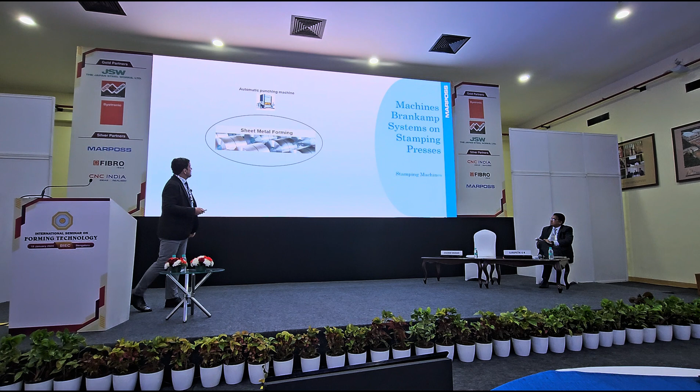What kinds of machines can we monitor? There's a huge range of different machines: automatic punching presses, high-speed presses, coining machines, drawing presses, fine blanking. You see, it's a wide range of machines that we have.

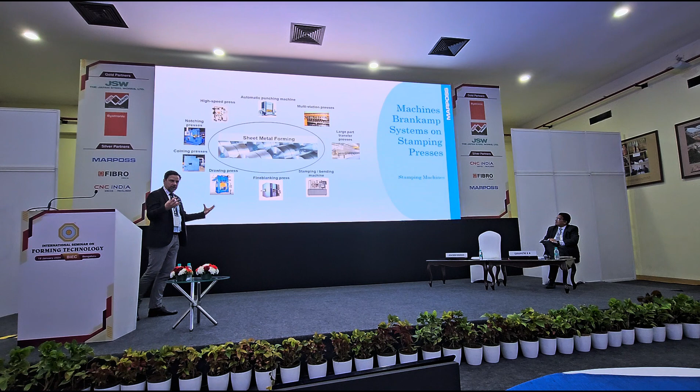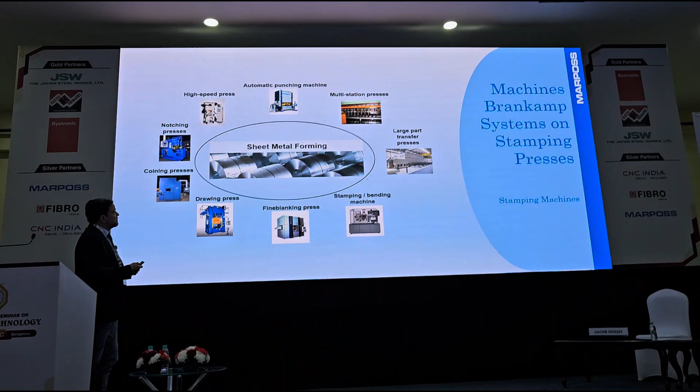Depending on the machine type, there are different approaches from the customer. If you have a large transfer press, of course you have more issues with, for example, splits or cracked parts, because you usually have drawing operations of the big automotive parts. If you have high-speed presses, it's more slug detection because you have very thin material and fine parts, and the machines are running very fast. So it depends on the machine what kind of application we can offer to our customers.

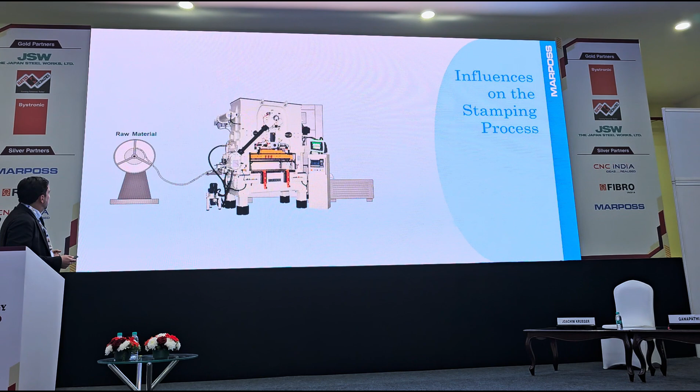What influences the stamping process in your plant? Of course, the raw material — we heard in the presentation before about the influence of the material — and of course the supplier.

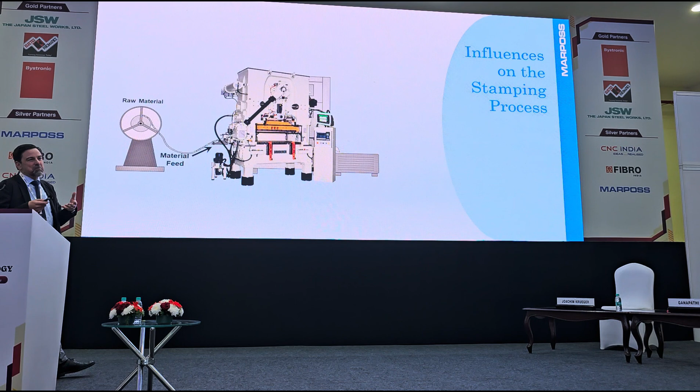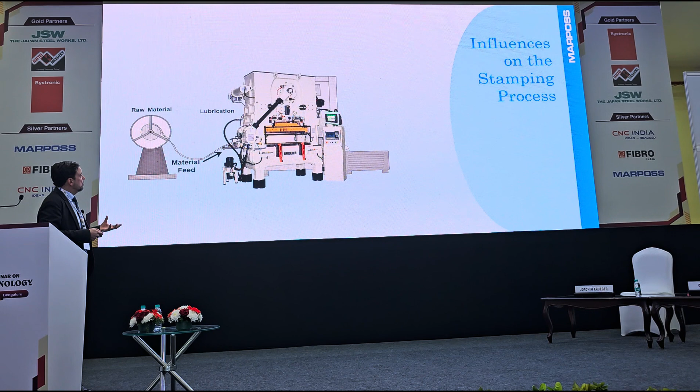So therefore, we have influence by the material, influence by the feeding. The feeding monitoring in stamping is mandatory to protect your tooling. Then we have the lubrication — sometimes it's more or less, maybe the oil is different, lubrication is different, so that also affects your process.

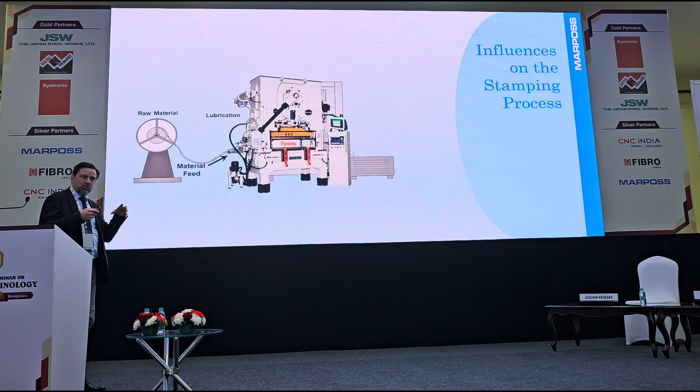Then the tooling — the tool wear, the condition of the tool, the setup of the tooling — all these things influence your end product. And then of course the machine itself: if it's in proper condition, good maintenance, or maybe the bearings are a little old or not good anymore.

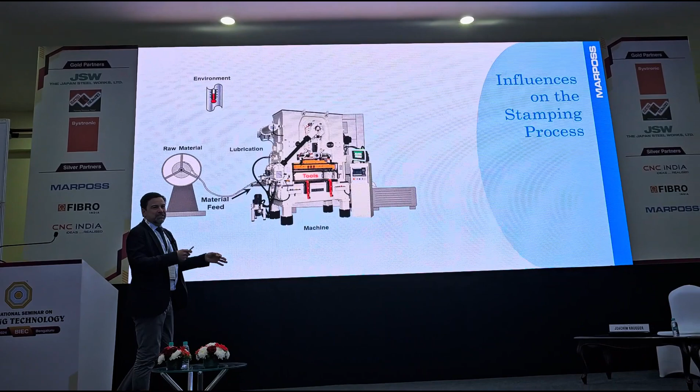So therefore it could also influence this process. The environment — with our piezo sensors, it's a difference if the machine is cold and you start it in the morning, or after 30 minutes when the machine is warm. We can see this as an impact on the force inside the tool.

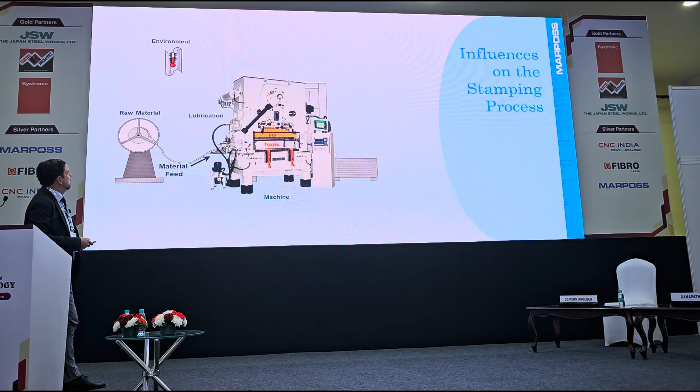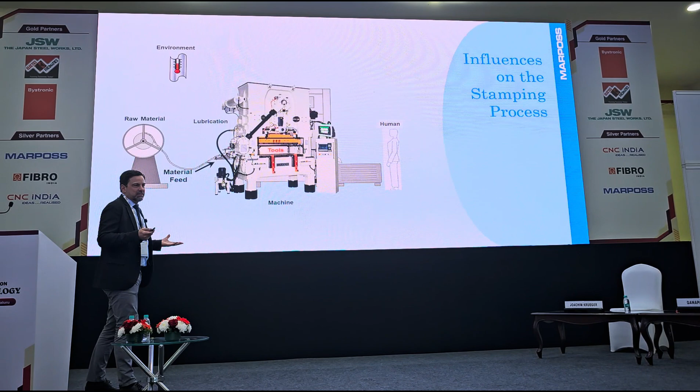And of course the human factor, depending on the operator — maybe the machine setup is done properly, or maybe it's not, and we can see this. These are very complex tools, so not every operator can handle them very well, so the setup of the machine and tooling ultimately comes down to the operator.

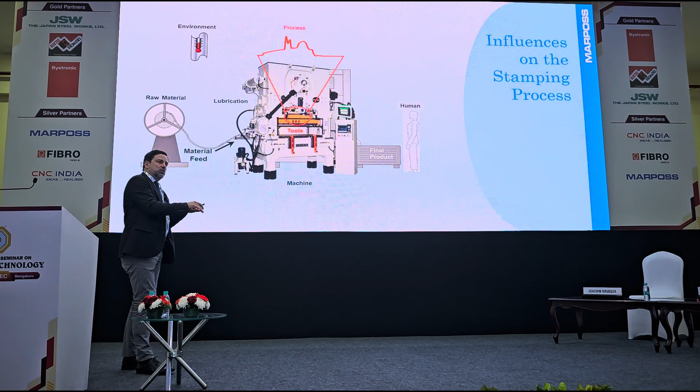And what we do is monitor in-process what's happening when the punch is going down and the stripper plate is going down. We collect these forces and try to find out if something is going on.

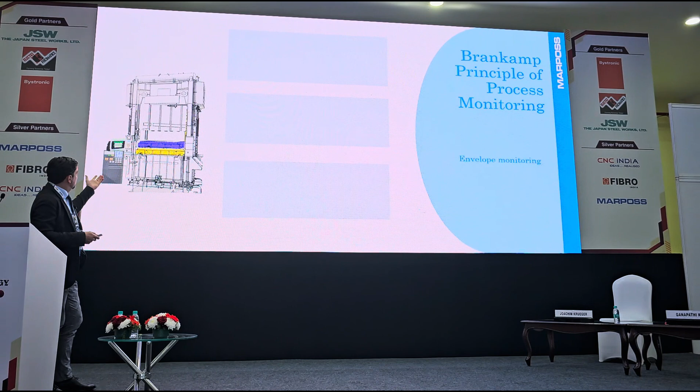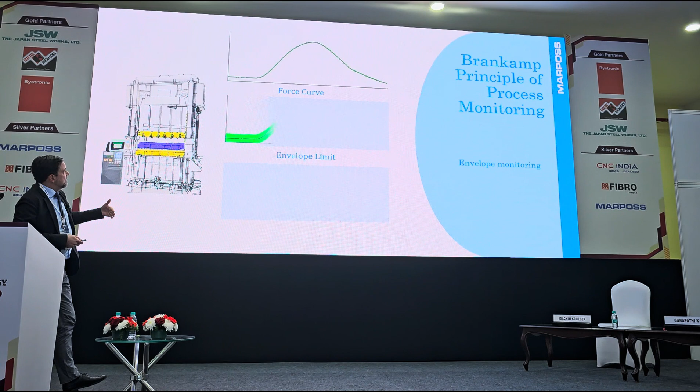The basic principle is this: we can mount different kinds of sensors on the machine, and as the machine moves up and down, we receive a force signal. In the next step, the system automatically puts an envelope curve with an upper and lower limit around this, so we are comparing one punch after another.

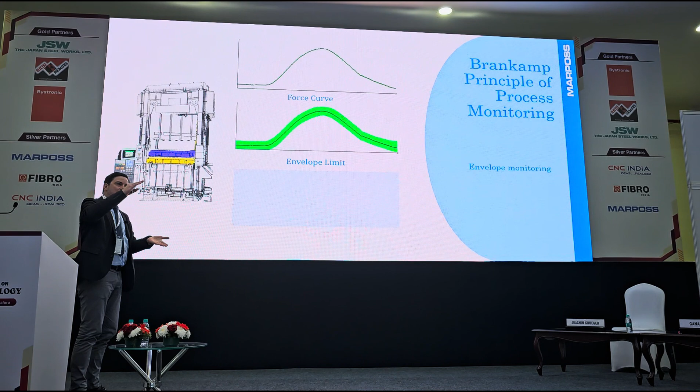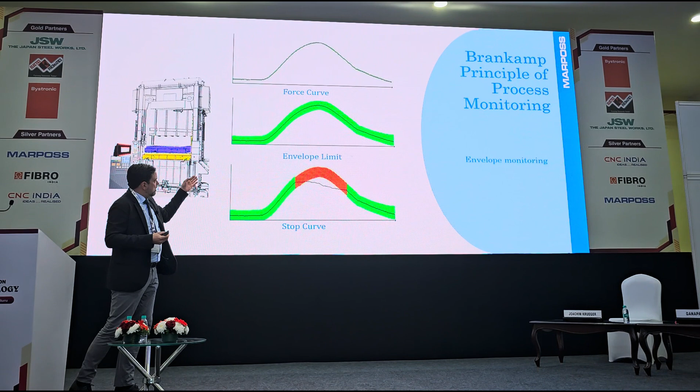After the teach-in, which usually takes half the stroke time — for example if the machine is running 100 strokes, 40 or 50 strokes are used for setup — the system automatically creates the envelope curves and the operator doesn't have to do anything. If something unexpected happens, like a crack, a slug, or a punch breakage, the force goes outside the limit and we can stop the machine.

For stamping machines, we usually stop the machine. If you have a sorting gate, we can of course sort out these parts.

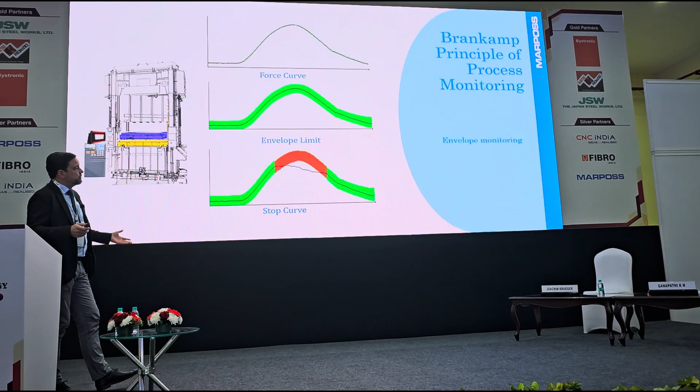The sensor positions depend on what kind of failure we want to detect. Of course, if you have small slug marks or scrap marks, we are not able to detect them with a frame sensor — we have to get close to the process.

But for example, for general monitoring, the frame sensors or the conrod sensors are good enough. If you want to go deeper, you have to mount the sensors behind the punches or in the stripper plate — you have to glue them.

We have different kinds of sensors for all these applications. Maybe you have to drill a hole, or maybe you have to make a pocket where we can glue the sensors.

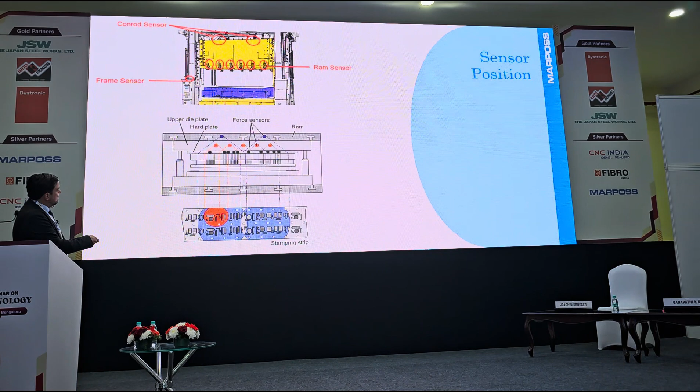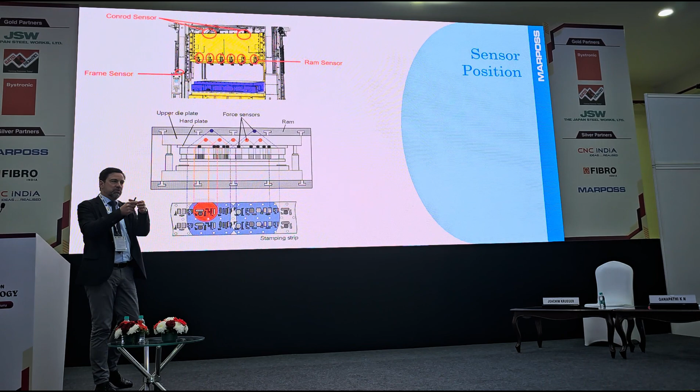In the next picture you will see the difference between sensors that are far away from the process — they can cover a bigger part of the tooling — and if you go closer to the process, then you have really precise, detailed information about a small area.

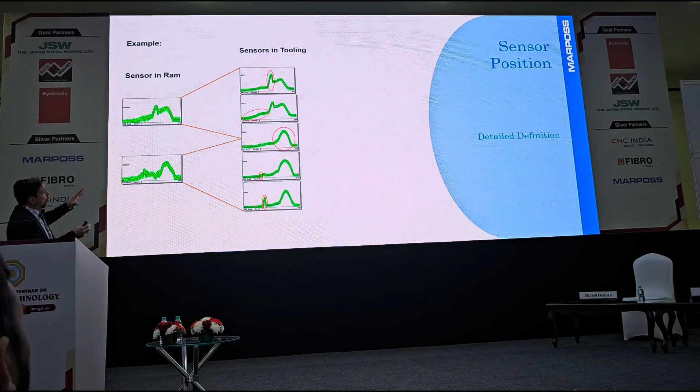Here's one example of the sensors in the ram — that gives an overall force for, say, half of the tool. As you go closer to the process, you get the signal for blanking, and you get the signal for the drawing operation.

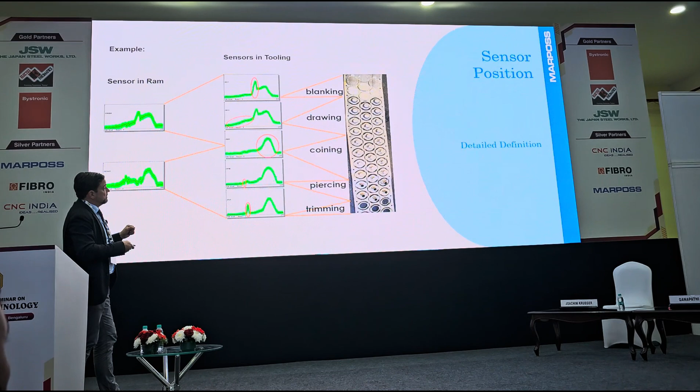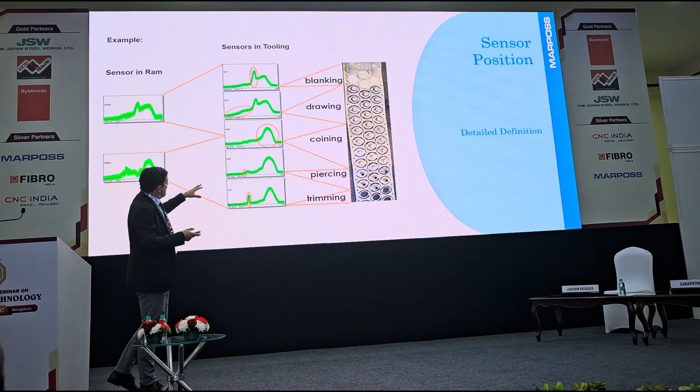You can see that those signals look different — you have a different signal for the piercing operation and for the trimming operation. So depending on the application, if we have a drawing operation and want to detect splits or cracks, we go into the drawing punch. If we want to detect scrap marks instead, we go into the stripper plate.

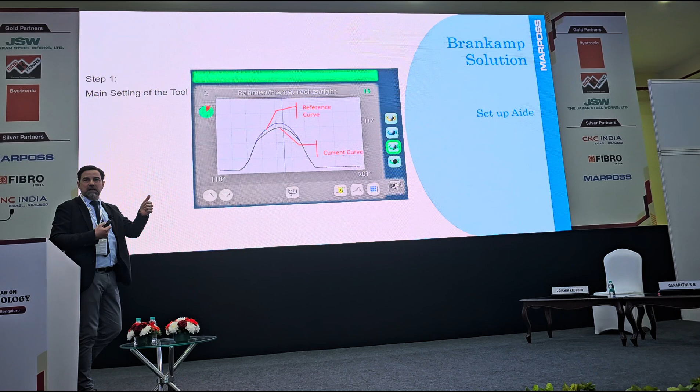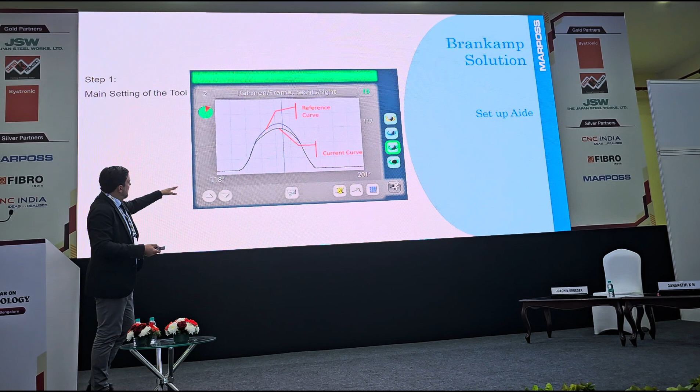During setup, if the operator is producing good parts, he can store that as a reference curve for each channel or sensor we monitor. Next time the tool comes into the machine, he can load this information and compare the reference curve with the actual curve. If it's close to the original, the setup is better, and the operator can say it's a 100% match to the last time he produced good parts, then start the job.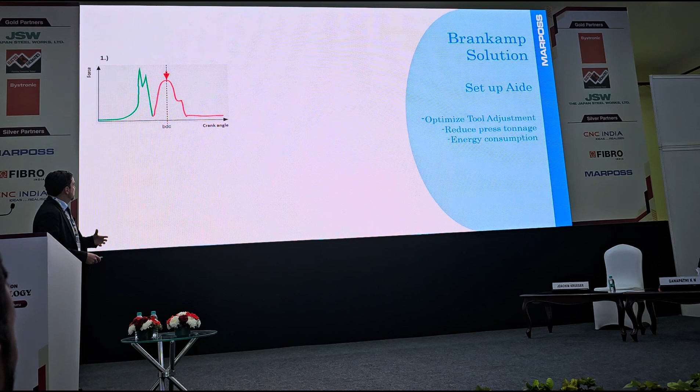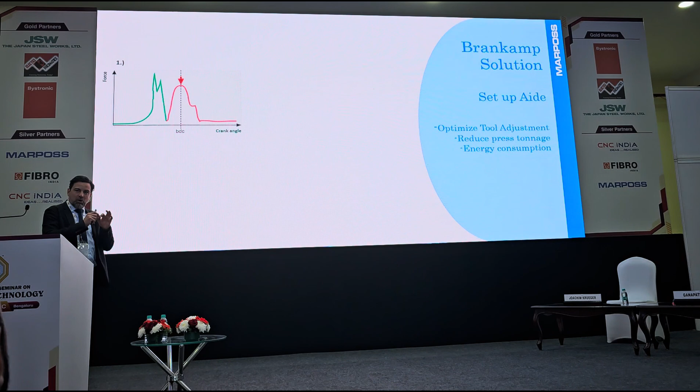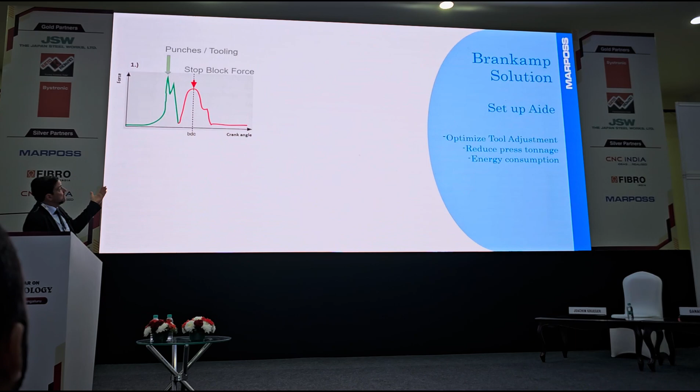Another key point is energy consumption. One problem is that some customers drive too far and then drive into the stop blocks, using energy they don't need. The green curve is only the force needed to produce good parts, while the red curve shows excess force from driving too much onto the stop blocks. If the operator detects this early, he can change the machine setup, and after a while get the perfect signal with lower energy consumption to produce the part properly.

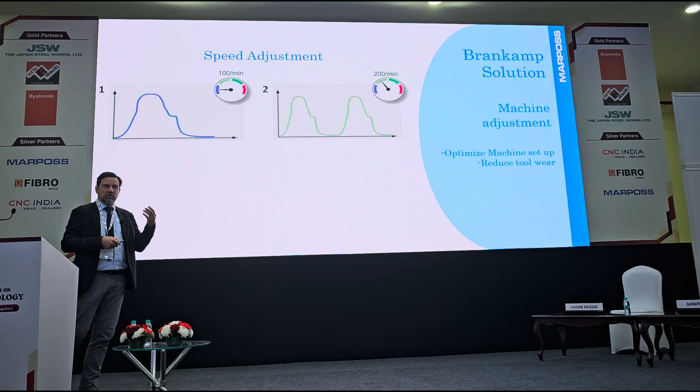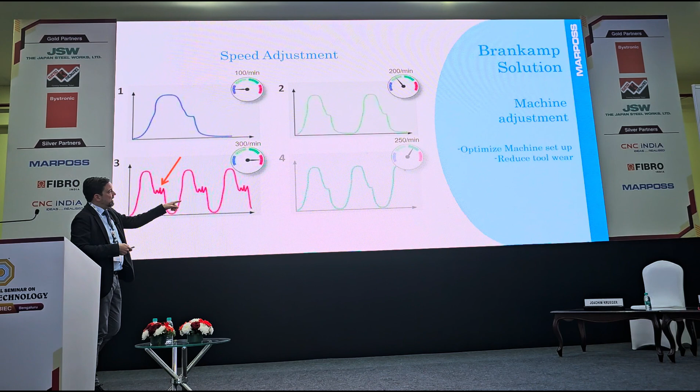There are also speed adjustments. If the quality factor is good enough and the signal is stable, you can run the machine faster and faster. If it becomes too fast, you'll see the signal changing, so the operator can reduce the speed and find the optimized speed for the product where the signal stays stable and the part is produced properly.

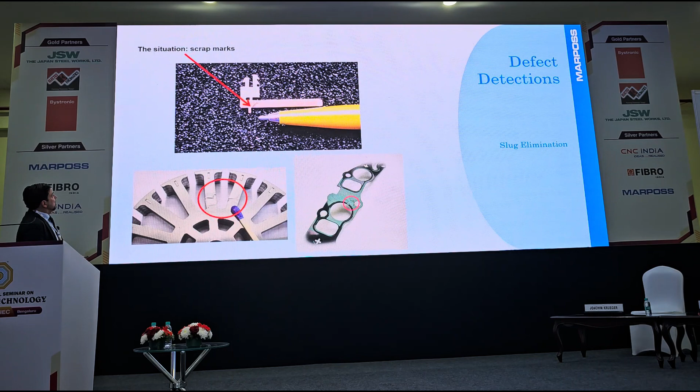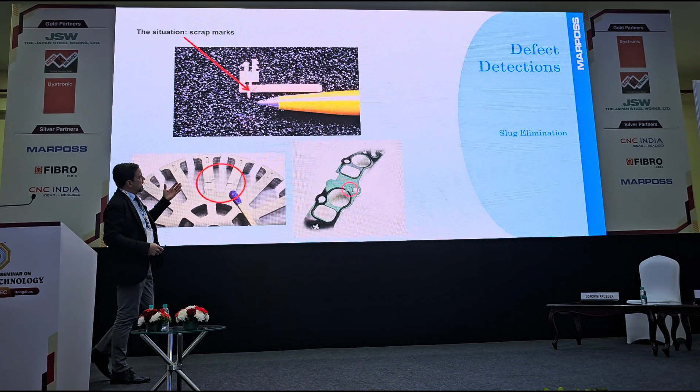Here are some examples of failures we can detect, like a scrap mark. It may look like just one mark, but if you produce 6,000 or 10,000 parts that go to customers, into injection machines, and are built into a car, it's extremely expensive to bring all those parts back. We've had cases in the connector industry with customer complaints requiring 10,000 parts to be returned, costing millions.

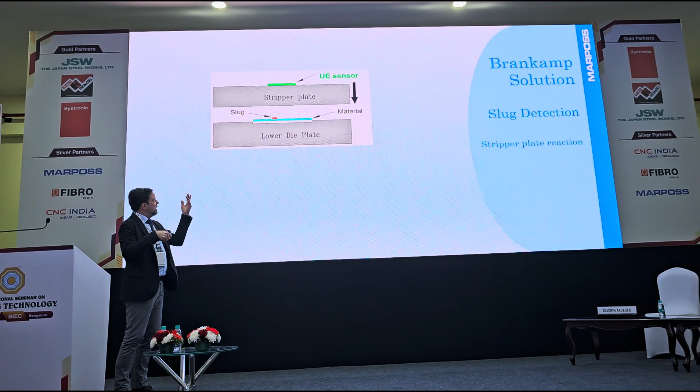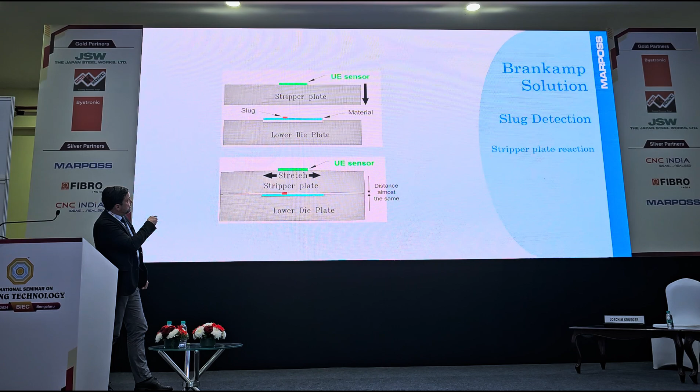This is the principle of slug detection. We go into the stripper plate and glue a sensor there; the tool department prepares pockets in the top of the stripper plate, and we glue sensors inside those pockets, running the cables out so the operator can easily connect them. If a slug falls onto the material, with the next punch we directly detect that material is lying between the sheet metal and the stripper plate, and we immediately stop the machine, telling the operator in which section the slug was detected so he can check the tooling and produce the part properly.

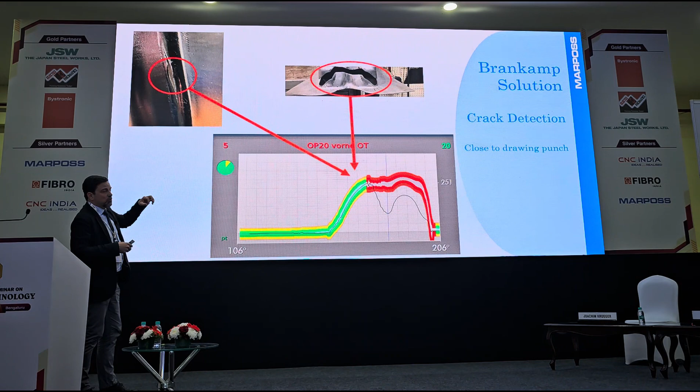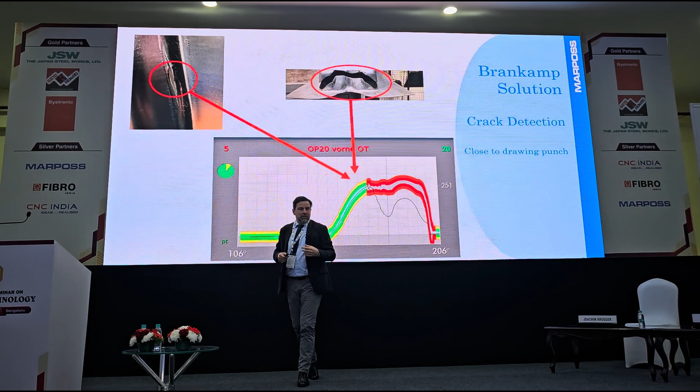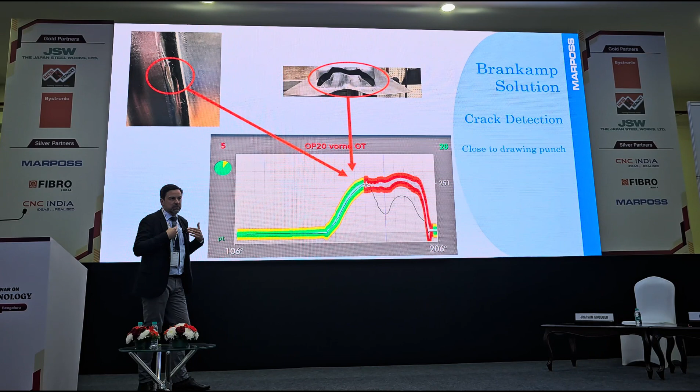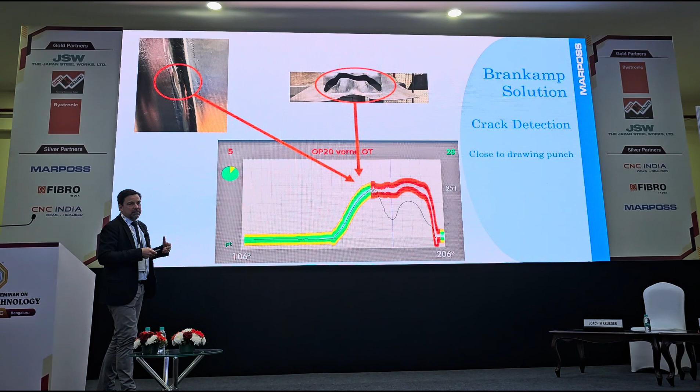Another problem for our customers is cracks or splits, which can be heavy or smaller. In this example, at the moment the crack occurs, the force goes down. You can't detect this with frame monitoring, which only captures the maximum force value, because that value stays the same even with a crack. Sensors in the frame also can't detect it for the same reason. So you need the envelope curve and to get very close to the process to find failures like splits or cracks in materials, which all producers of drawing parts are familiar with.

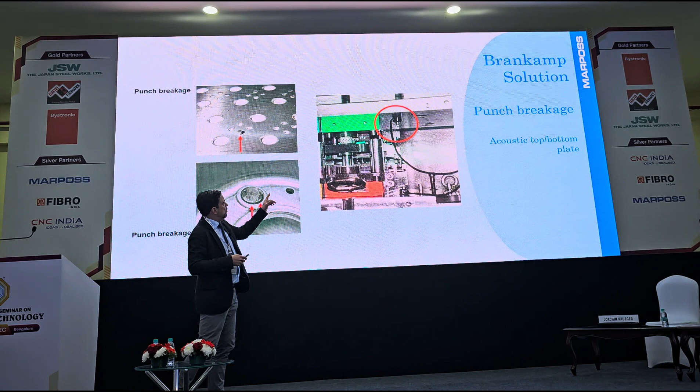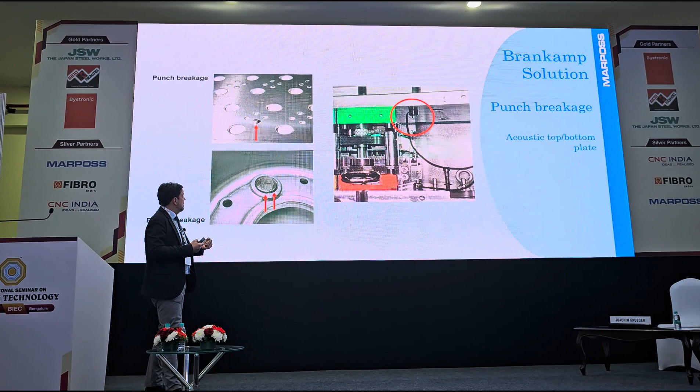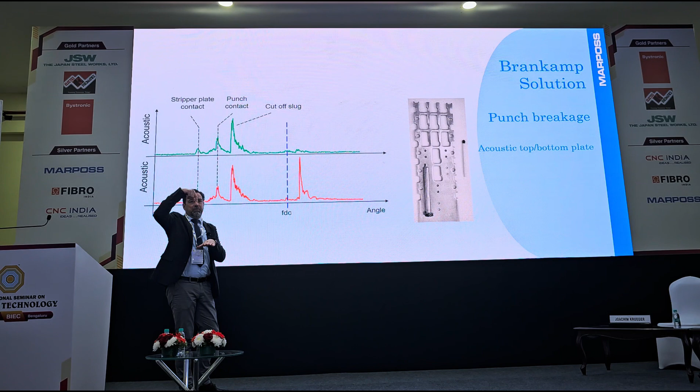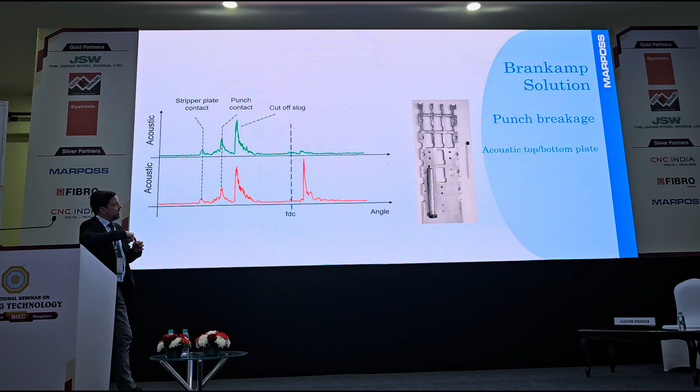Another solution is for punch breakage. Here we don't need to go close to the process; we can mount acoustic sensors on the bottom or top plate, depending on whether we want to detect a die crack or a punch breakage, and even small punch breakages can be detected. We look into a specific area, here's the regular process, here's 180 degrees, and a punch breakage can appear as the press is going up. In this case, no forces can usually be detected by other sensors, but when the machine lifts up and there's a punch breakage, we can hear the noise through the machine with the acoustic emission sensor.

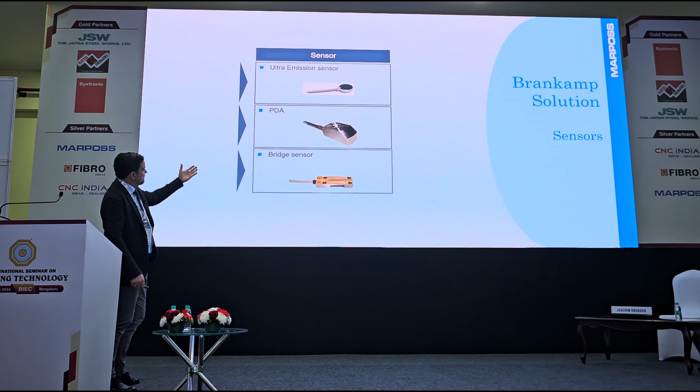What kind of sensors do we have? Here are 3 examples: ultra emission sensors, and piezo sensors for slug detections. We have frame sensors and bridge sensors. We have other sensors that we can glue or mount into a hole, so there's a huge variation of different kinds of sensors for each application.

Now we can also customize machine parts and sensorize them so that we are directly above the punch, so that we really have a single signal of each punch.

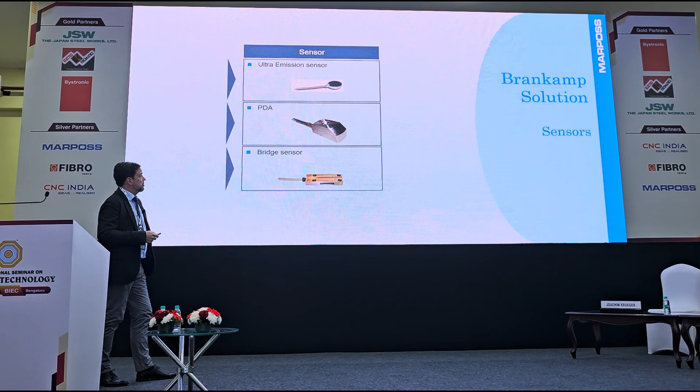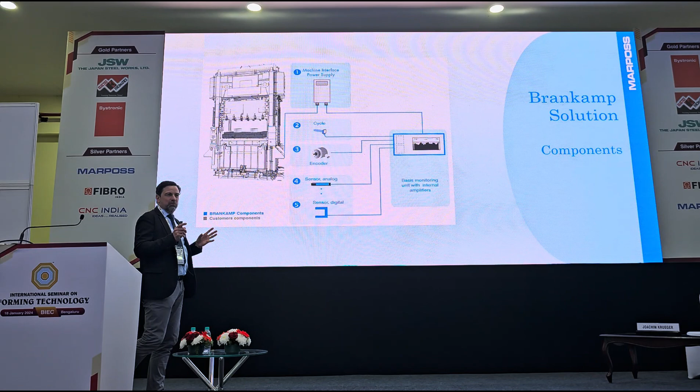The general setup of the machine is always the same, because we need to talk to the machine, we need to stop the machine, we need to know if the machine is in running mode or in jog mode. So we have a machine interface that is connected to the machine, and the monitoring unit itself. We need a cycling signal, and in the best case an encoder so we know exactly which degree we are at. Then we are able to connect a couple of sensors.

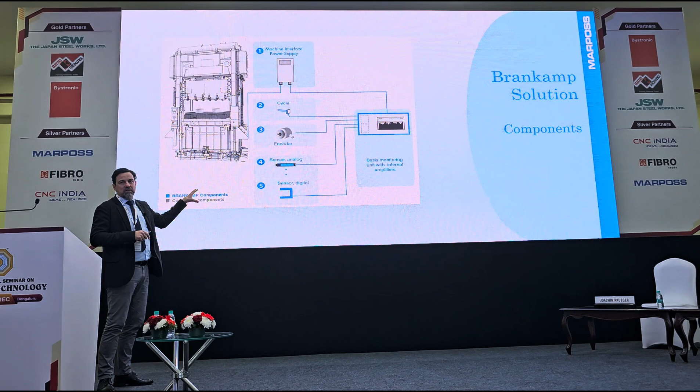Could be piezo sensors, could be distance sensors. For example, if you're working with distance sensors for slug detection, you can connect them to our system with the envelope curve and monitor it. Also digital sensors for feed control, we can connect up to 16, 24 sensors depending on the model.

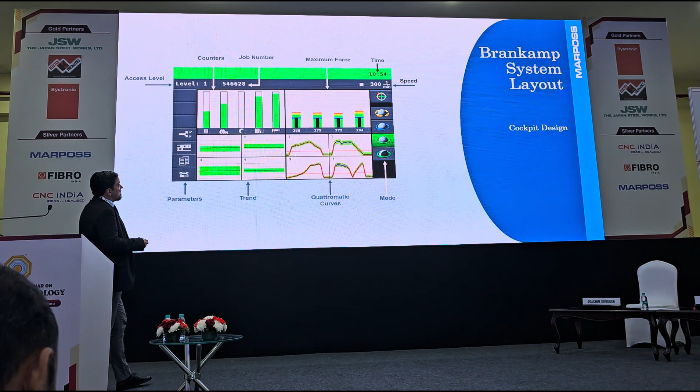This is the general information that the operator has. You can see it's very easy to handle. They can press a setup button, then automatically the curves are set. We have maximum values, trending forces, and a variation of different counters.

This is one of the units that we have. It depends how many units, how many sensors you want to connect. We have units up to 8 sensors and other units up to 24 sensors.

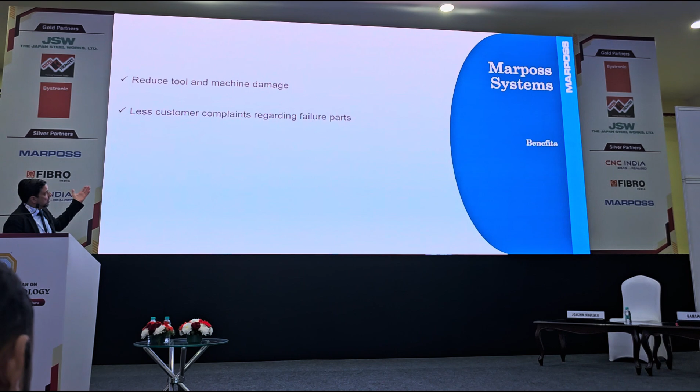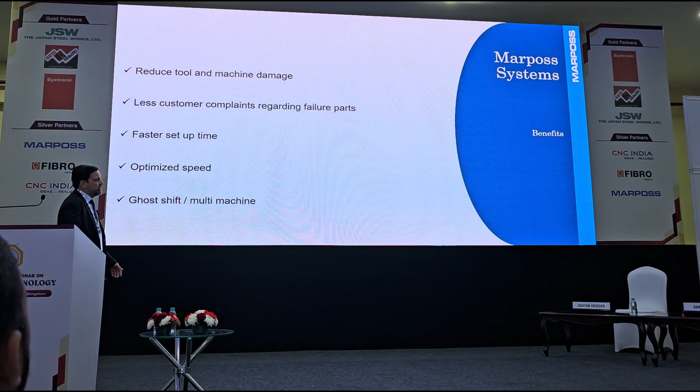The benefits I explained at the beginning are to reduce tool and machine damage, fewer customer complaints regarding failure parts, a faster setup time, and finding the optimized speed. It's a big topic in Europe, multi-machine, one operator handling 2, 3, 4 machines depending on the company, so it's always good to have this protection. If something happens, we directly shut down the machine and the operator can then go to the machine and check what's going on.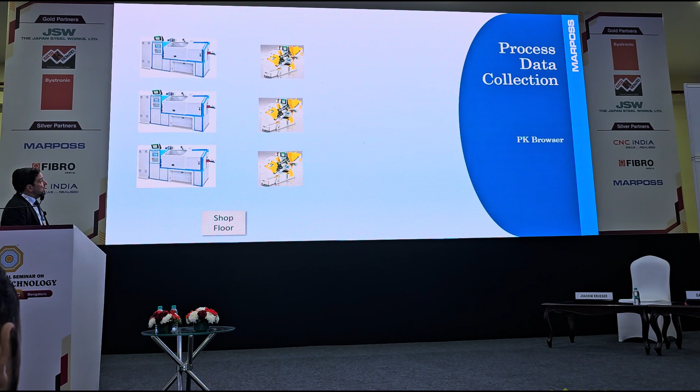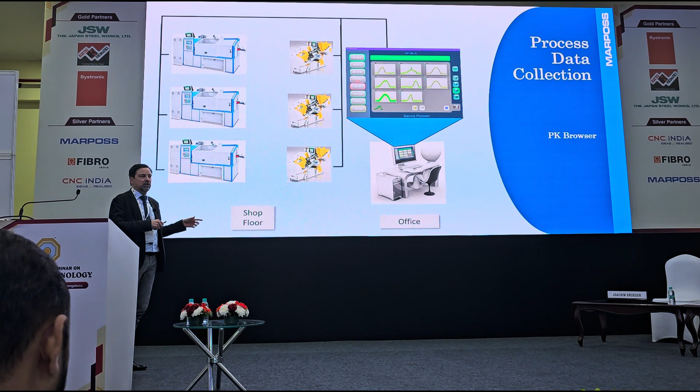Now coming to the next topic, process data collection. We can connect all those units to your server, and you can sit in the office and have the same view as the operator. So if you have a supervisor in the company that takes care of this information, he can sit in the office, check if the envelope curve setup is okay, and check directly, without having to run through the plant and go machine to machine to machine.

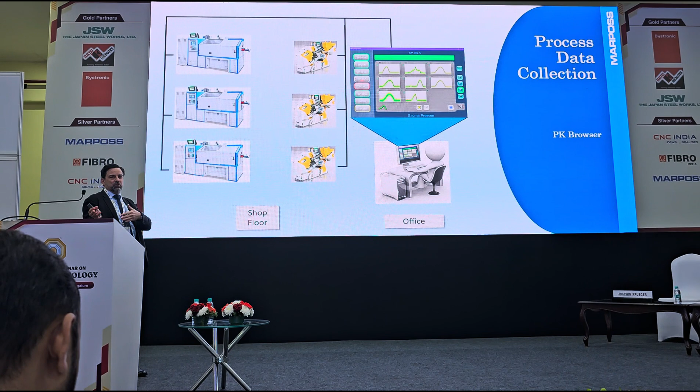He can sit in the office and have the information. We can store all failures automatically, so for example in the morning you can check what happened in the night shift. Do I have some stops? What kind of failures? We can see directly the curves. Of course, you can maybe delete these after 6 months, because if you don't receive a customer complaint, you don't need to store that data.

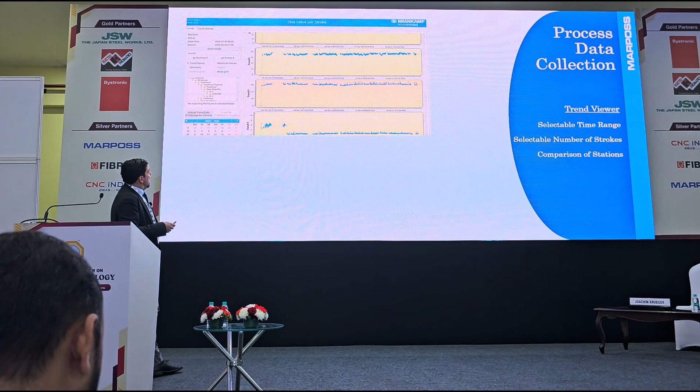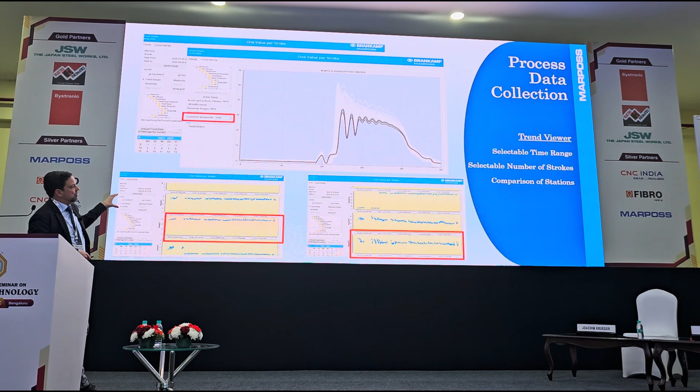And if you want to go more into detail, like long-term trend, you can store the exact curves and see the behavior of the tool wear. You can see the reaction of the machine after a tool change, or after a coil change, maybe if you have different suppliers. All these features are available for you if you have installed such monitoring units.

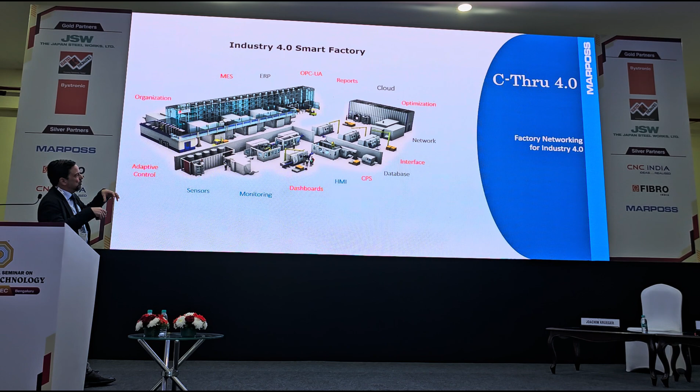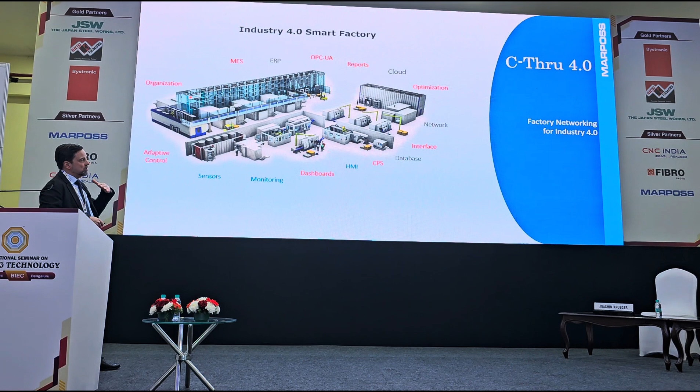Last but not least, Industry 4.0. We are always in the middle between the operator, the machine, and the ERP and MES software. All of our units are directly MES ready. We have our own software called C-Thru, but we are also free to connect with OPC-UA to other third-party systems. So if you have an existing MES software, we can use OPC-UA and send you the counters, the good parts, the bad parts, the stop reasons of the machine. Everything is available.

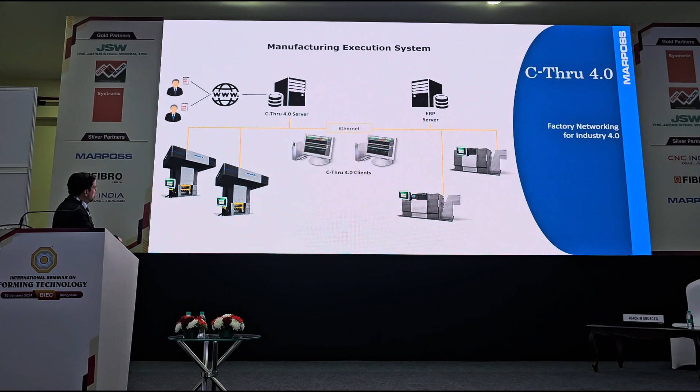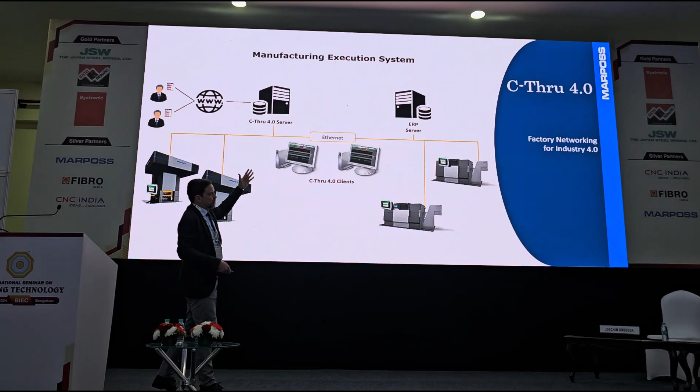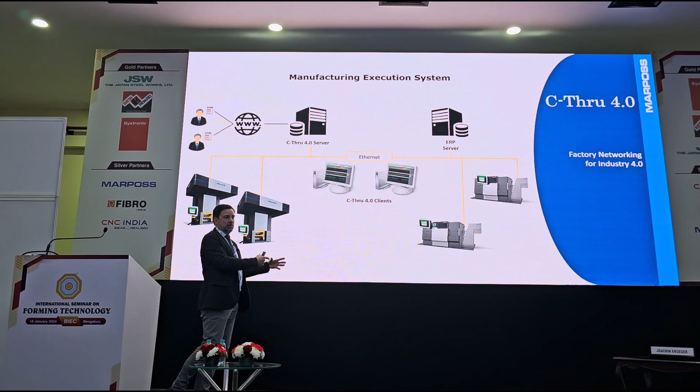With the connected world, it means you have connected all machines to the network. We can store the data on our own C-Thru server. We are directly in contact with your ERP server, so we receive the information on which job should run on the machine, how many parts should be produced, the speed of the machine, when the job is planned. All this information comes out of the ERP system, and we can forward this to the machine, for example to the monitoring unit, so that this job should be produced on this machine, or maybe on a machine group.

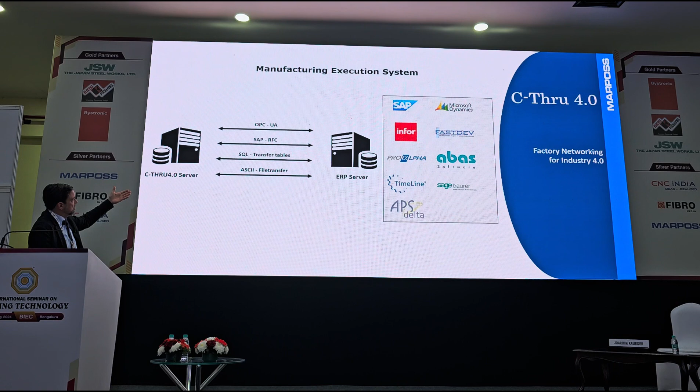And we have different kinds of interfaces, depending on the customer needs. If you have SAP, for example, there's a special interface. Otherwise, usually it's good enough to have transfer tables, file transfer, OPC UA.

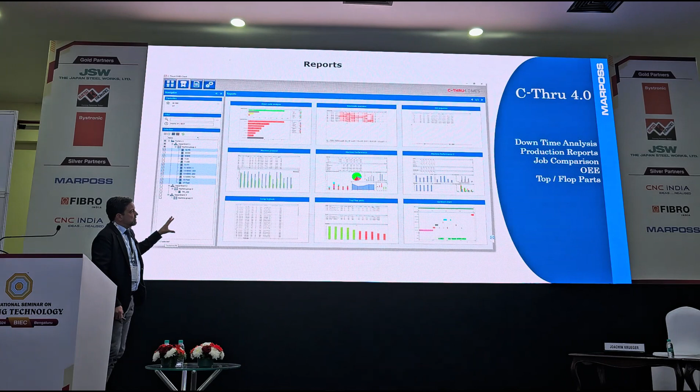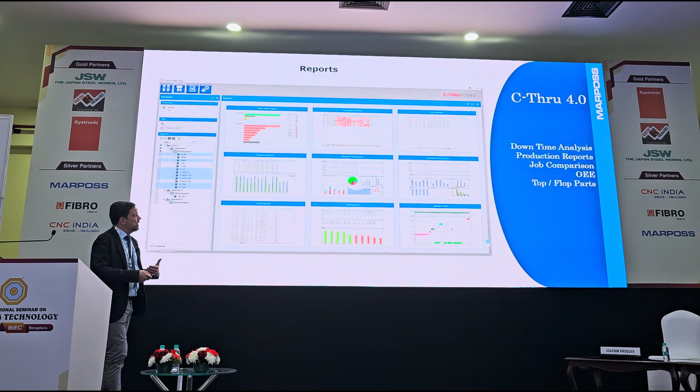If you're connecting this data, then you are able to do much more analysis of your company. So we want to find the weak points of your production. Why is the standstill of the machine? Why is the OEE down? And then we have the possibility to have a couple of reports already in the system, so you don't have to take care of this. Everything is directly in the software.

So that's it from my side. Thank you very much.